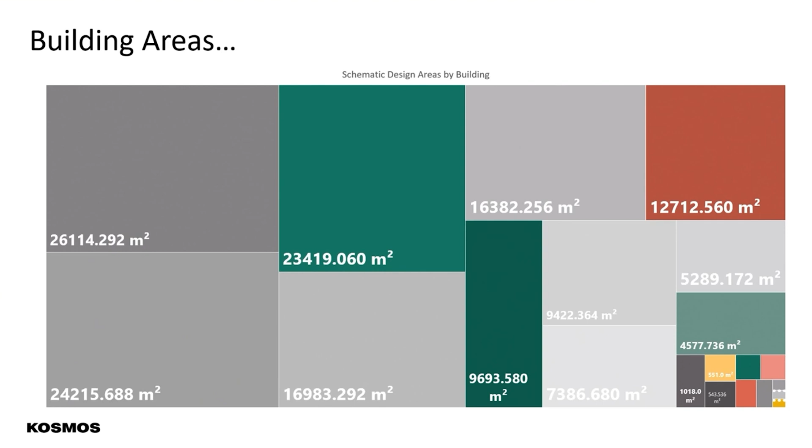For us, the delivery strategy is quite important. It is about collaboration, communication, and very much about integration with the other stakeholders and design teams. We've developed a commercial management strategy, the KOSMOS roadmap, as we call it.

It identifies key deliverables within each of the phases. That includes assessment of 3D information, the quality of data, the quality of information, how we communicate that, and the meetings we will have along the timeline. We often take weekly meetings with each discipline lead along the project lifecycle to discuss what they have prepared and produced within the models, within their specifications, within their drawings.

We do not wait until the end for this. This is a continuous process with the design teams. Effectively, it's the design teams that are producing our information at the end of the day; we're just restructuring and reprocessing it. So it's very important that we have that close communication and collaboration. The KOSMOS roadmap becomes something important to us and what we're trying to communicate with our clients.

Understanding BIM - we have a lot of talk about it today. I'm not going to go into too much detail, but it's very important to understand the information that you will be receiving at the different design stages.

What is an LOD 300? How does that impact my process? What information will I be missing? How do I deal with the information that I'm missing? How do I manage that risk, that cost risk, for us as QSs?

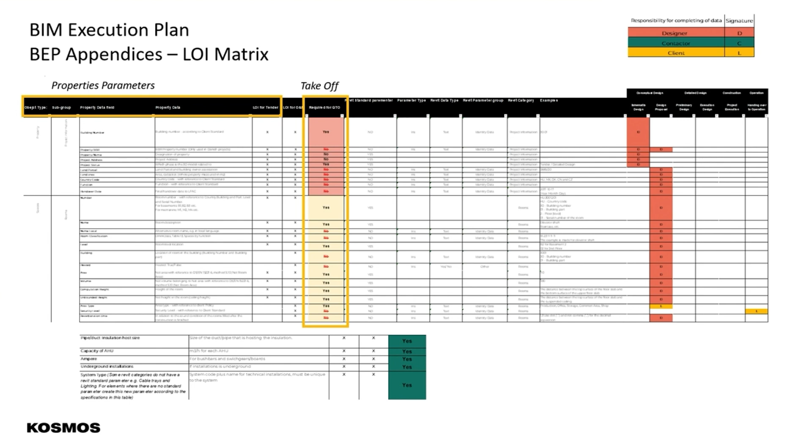That level of information relates to each component, and more importantly, what's included in the component. What are we looking for? What's our measurement rule here for this particular component?

An example would be foundations. Foundations as a geometry in a model tells us something, but not everything we need to know. So cubic meter for concrete, kilos for reinforcement, square meter for formwork, cubic meter for excavation, etc.

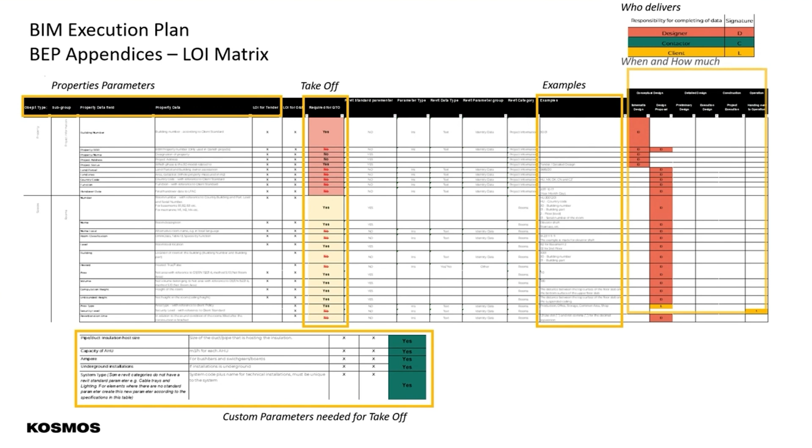All of this needs to be understood by the design team so that we can get accurate, good quality information from them and allow us to process it. And then we've identified who delivers this - is it the engineer, the architect, the client, the QS?

Quite an important document, a lot of information discussed today about quality of information within the BIM execution plan. But if anybody reads your BIM execution plan, does it define the 5D process within it - the information you expect to receive from your QSs and quantity surveying consultants? More than likely not, because the BIM execution plan focuses on design output in reality and not necessarily the process of information for all stakeholder groups.

So what we've derived here is a 5D requirements document for the BIM execution plan. We've tried to specify what's important within the IFC export for 5D - it's not just an IFC export. If you export IFC with all the information from Revit, the file becomes too heavy and big for our software when we use CostX to process that. So it's very important that you communicate this with your design team, so what you're actually getting is what you have identified within your BIM execution plan, that level of information that becomes important. Not all parameters are necessary.

What this allows us to do then is to manage the quality of information, which is what we're all about here really - that's what all the presentations are about. It's about the quality of information, how we process it within our discipline, and how we feed it back into the other disciplines, and the accuracy, and what is not included.

That's very important from a QS's perspective, because we don't model everything. Our assessment is that we probably, in terms of direct construction, model about 60% of the building from a cost perspective, meaning there's 40% of the building we don't model. In terms of the overall client investment, we actually only model around 40% of the entire project, so there's 60% of it we don't model. So we're never going to get everything from the model, and we need to make that clear.

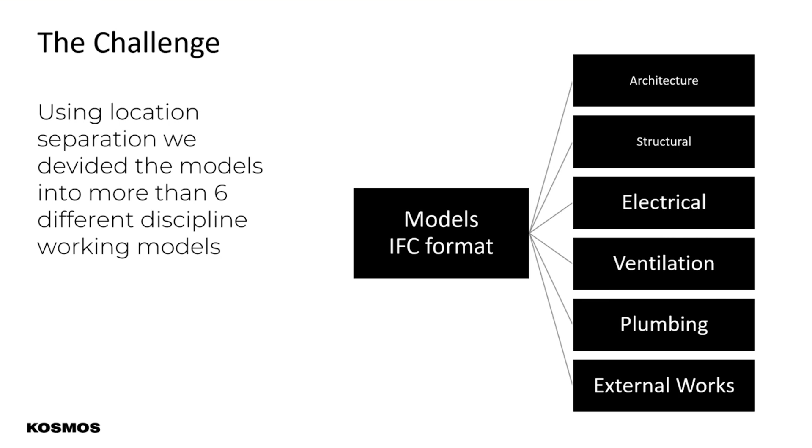So how do we manage 26 buildings? How do we manage 156 models? And how do we estimate and prepare cost plans quickly for our clients that are accurate? So how we set up the project was we had a master file within CostX - that's a campus-wide file focusing on the entire project.

Within that master file, we use ICMS, as mentioned, International Construction Measurement Standards - that's our main structure for cost management. We use that in all our projects for data structure and analytics. We then coded the model, identified in zones, so each building was a zone that allowed us to have an output for each building. So we estimate the project from a master file perspective, and then we have an output that went to each building - 26 buildings, but managed within one single process.

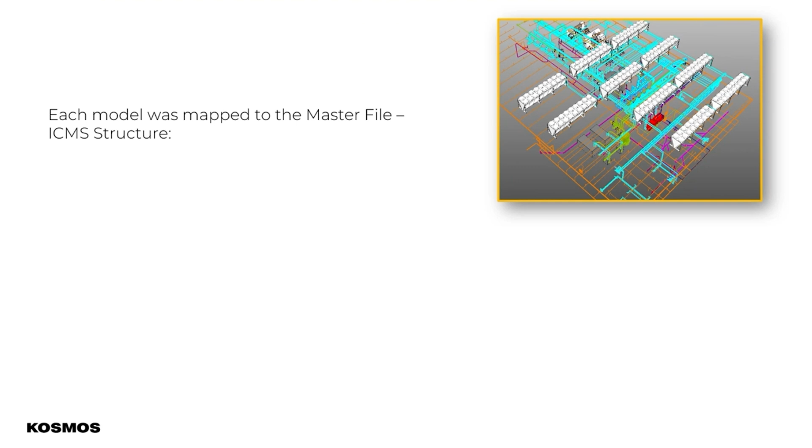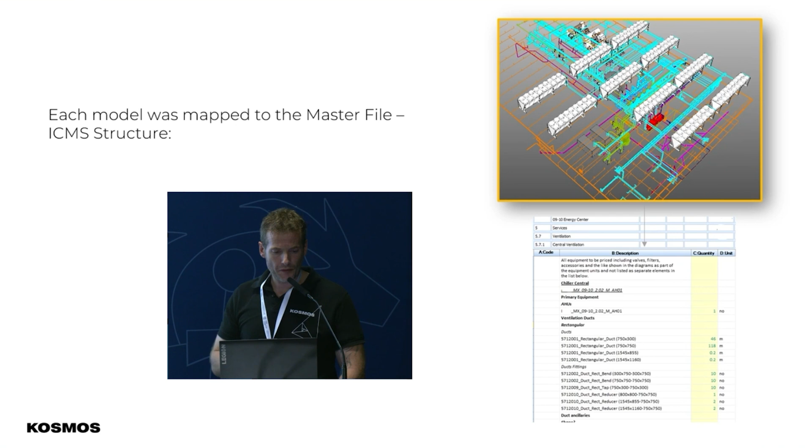That was for each of the disciplines, still unfederated at this stage, because if we federated the models, CostX actually wouldn't be able to manage it for us. So each of the models was mapped to the master file. This is an example of a ventilation system mapped to CostX. That allowed us to update our cost plans, our cost estimates, as the project went through the project lifecycle. Elements change always, and the string of information that you have mapped within CostX also changes. So it's a case of data processing as opposed to quantification, which allowed us to do it within a small team, and I'll come to that in a minute.

So the commercial management strategy - we had a number of documents to produce here, over 30 documents: a cost plan, a cost estimate for each building, or BOQ, external works, preliminaries, preambles, risks, overhead and profit, etc., etc. So it wouldn't be possible for us to generate these documents without this flow of information and the standards that we have just discussed.

So the integrated process - from our perspective, BIM is an integrated process. We need to collaborate with all stakeholders in order to work with the information produced by others. We cannot do it in isolation, and it's one of the biggest challenges for quantity surveying practices today - they still think they can operate the same way they did years ago, but in a digital environment. It's impossible, because you need to collaborate. You need to be in the full project life cycle, and take the conversations with the design teams. So from our perspective, design is a central focal point - it could be the project, depending on terminology - and everybody feeds into that information and communicates across.

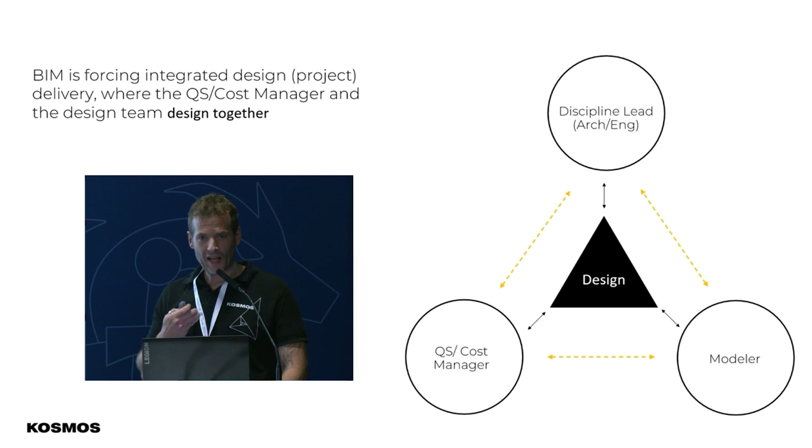That's why we take weekly meetings with each of our discipline leads, whether it's electrical, mechanical, architecture, or structure. We take it with their BIM coordinator and their modelers, as well as the designers, so that we are coordinating the quality of information. That's not our role and responsibility - that's the design team's job to deliver it. But if we don't get the information in good quality, we can't do our job. So it falls on our shoulders to make sure we can do our job properly.

So that integrated process with each of the discipline leads is identified in the KOSMOS roadmap, and becomes key to delivering good quality information and receiving good quality information.

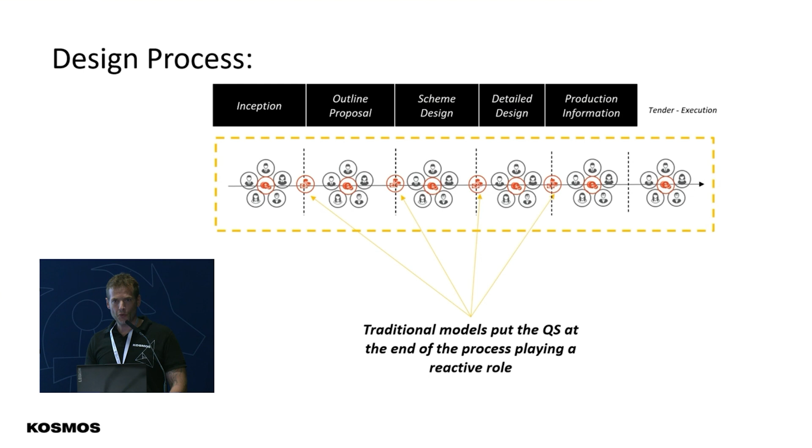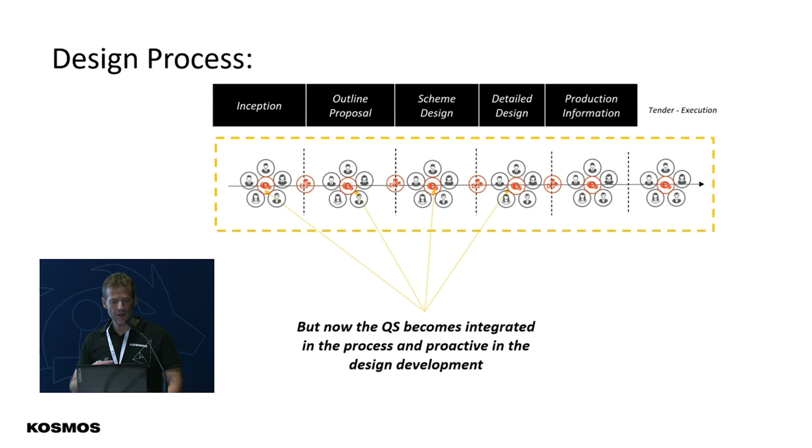So the design process from our perspective - the traditional model is the QS and cost manager sits at the end of the process. They wait for the information, receive it whether it's 2D or 3D or specifications, and then try to process that information. Traditionally, it's measuring from 2D, whether it's PDF or DWG. But what we need to do now is move that time and effort back into the project, so we are running on the project with everybody, building the knowledge base of that information being produced, so we can process that information quite quickly at the back end.

That means you're creating cost plans and bills of quantities along the process. It's not something you do at the back end - it's something you're developing across the entire project lifecycle for the project.

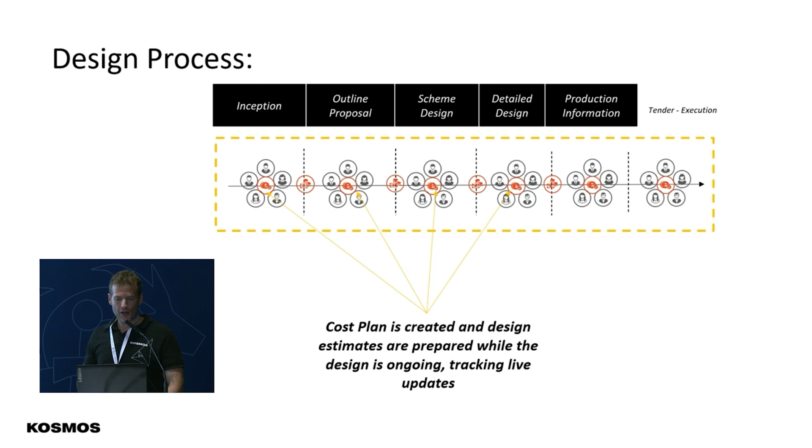In terms of data management, we focused on data rather than estimating - on data management rather than quantification and quantity extraction. It was data management that allowed us to process this information in a very quick and accurate output. So we looked at data libraries for our costings within CostX. We focused on that master file, allowing us to price the project once, with an output being multiple buildings, multiple cost plans, multiple documents for the client.

Right now the clients are still working in kind of analog, so they're PDF documents, Excel, depending on the contractor's needs. But in the future, that'll be a digitized workflow, I would say.

So the result out of all of this on this project - and it's quite a large campus - we're taking a manual process, quantification, and standardizing it using ICMS, using our digital tools like CostX. We're digitizing that process flow, using the 3D models in order to quantify, and then we're automating it. So we can update the models - if the modeled information hasn't changed, you can update those quantities quite quickly by importing a new IFC. That allowed us to focus on the project itself.

The results - 26 plus documents, over 30 documents needed to be prepared. We had a team of only 5 QSs working on this. That's 26 buildings, 160,000 square meters. The time for processing - I'll go through it at each of the design stages - but we had priceable items of around 6,000 rather than 120,000. So if you had to price each building individually, it's impossible.

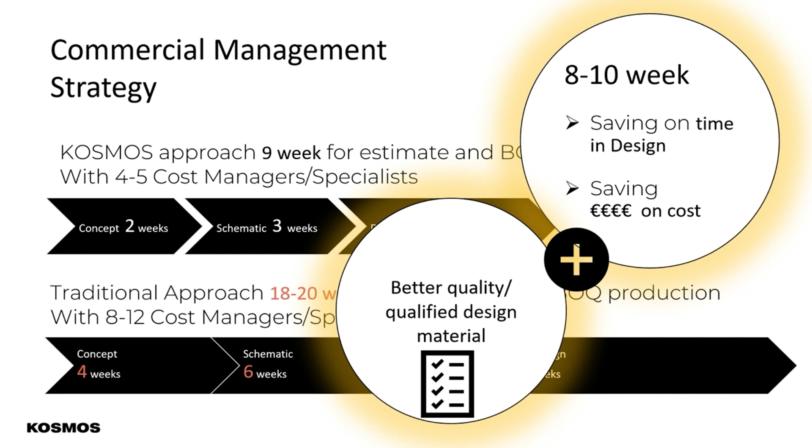So here in terms of the conclusion, the 5 key takeaways: value-driven cost management for QSs. It's an integrated approach. You cannot sit at the peripheral of the project. You need to get into it.

I would say that the digital QS needs to be involved from the beginning. So the BIM execution plan becomes a key aspect here, making sure that you get your requirements as a cost manager into the BIM execution plan. If it's not there, design teams won't deliver to your needs because it's not part of their contractual deliverables. So you need to get into the conversation and make sure you get your needs in there.

I would say regular communication, weekly discussions with each of the disciplines. What those discussions also do is build trust between you and the disciplines, whether it's the architect, the engineer, the mechanical, the electrical. In that trust, the QS and the engineer will reach out if they see an issue in terms of change management. It also means that your weekly discussions with the individuals doing the work can also cover change and risk, not just quality of information. And that builds a big collaboration between the cost managers, who are also managing change and risk, and the design team who are actually producing the project.